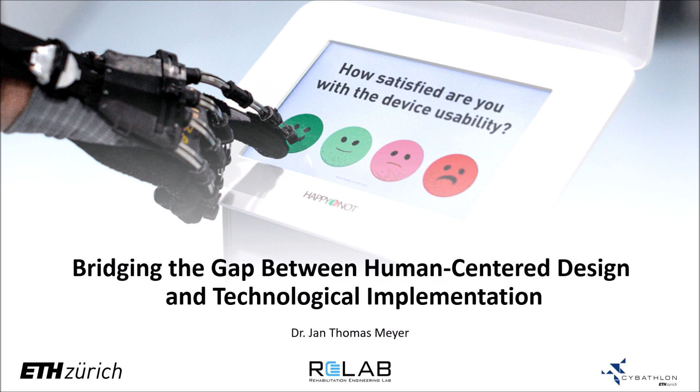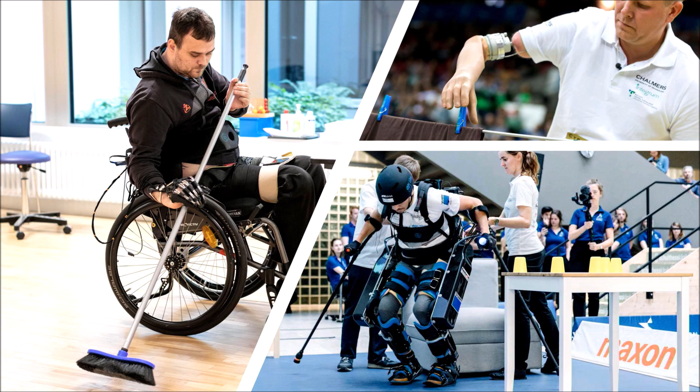Hello. Today we want to talk about how to bridge the gap between human-centered design and technological implementation. And for this, we of course first have to understand what human-centered design actually is. So, recapping a bit my personal situation, I have been very interested in advanced assistive technologies already in bachelor's and master's. And I've seen technologies all around the world, also, of course, at ETH, that look fantastic. You see people with disabilities getting a functional advantage out of them. And of course, at the CYBATHLON being showcased.

But looking a bit deeper into the topic, we realize that there is an extremely largely unfulfilled potential of advanced assistive technologies due to missing availability and accessibility. And that means that there are not enough devices on the market, simply said. Why is that? We believe that the main limiting factor of this missing availability and accessibility is actually the fact that the technology acceptance of these devices is still rather low. And also once they are deployed, there's a high chance of abandonment because the devices unfortunately have an inadequate daily life usability in a lot of cases. So this was something we had to look into.

And funny enough, this was actually exactly how I got into the topic of user-centered design, because the inadequate usability of a device that participated at CYBATHLON in 2016 is the reason why I stand here today. The VariLeg lower limb exoskeleton performed at the CYBATHLON 2016 with 2 pilots. And even though the performance was very good, the device ran smoothly, it was a beautiful experience for everyone, research wanted to continue on the device. And for this, we needed the pilots to come back into the lab and perform studies with us.

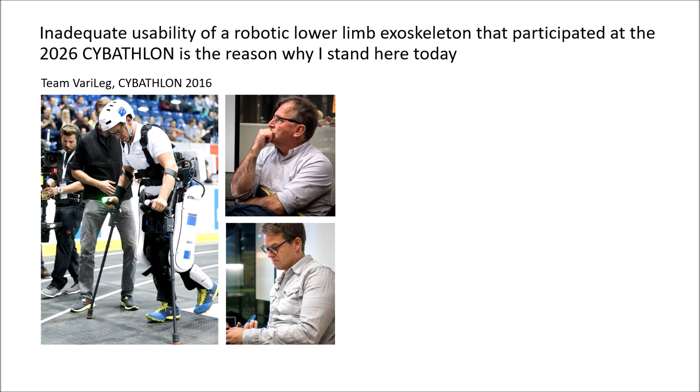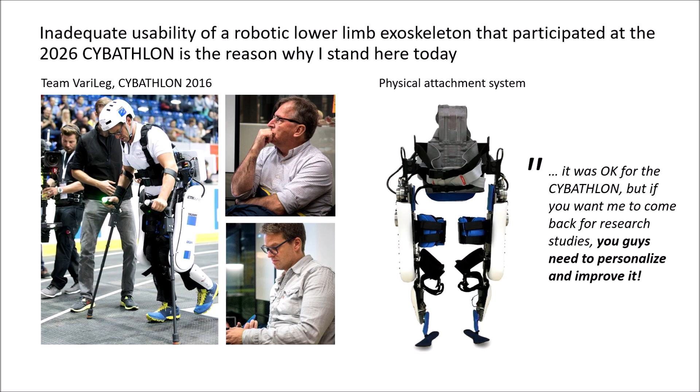Then they said, well, listen, the device was okay for the CYBATHLON. It was an amazing experience. But if you want me to come back and use this on a daily or weekly level, you really need to improve it, you need to personalize it, and it needs to be more comfortable for me personally. So you can see that using a device for a short matter of time, for a competition, is something else than using it over a long period of time.

And my challenge in that part, this was my master thesis actually, was to improve the physical attachment system. So how the pilot is attached to the device. And for this, I tried to follow a very simple mantra. Frank Chimero actually has a good quote on the fact that people simply ignore design that ignores people.

But what does that mean? It means that when you think about it logically, you can never develop a technology without the people that it is designed for. Right? And for me, it felt quite natural to try and develop a new physical attachment system together with the target users.

That meant, first of all, understanding what the problem really was, instead of already trying to go for a solution. So I really tried to understand what's the issue with the current solution. So we evaluated on a subjective level together with the target users, plus, of course, some people who can also tell a bit more about uncomfortable zones below, let's say, the injury level of spinal cord injuries.

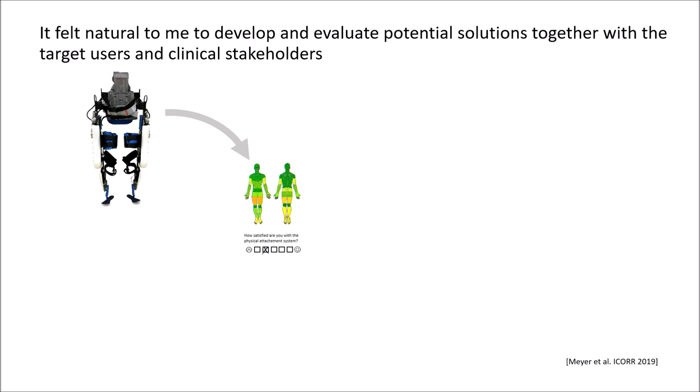We then had a lot of co-creative sessions together with those two users to understand how they would design it. They might not have the technical abilities at hand, but they surely have great ideas. And that's what we did. So together with the people with disabilities and together with the clinicians, we started ideating. Then we came up with a few concepts. Of course, nowadays you can do rapid prototyping with 3D printing.

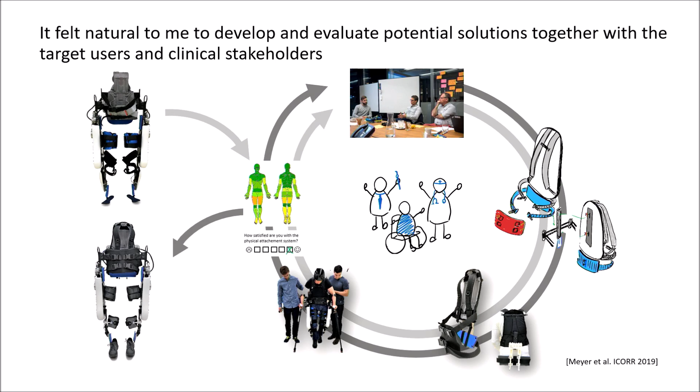And in all these steps, we always went back to the target users and to the stakeholders. And we asked them about their feedback, and we kept iterating. And we actually did this not only once, but several times, such that we eventually ended up with an improved physical attachment system. That was to the large satisfaction of those target users, because we were able to customize it, to listen to them, and to improve it.

Now, what we did there was actually the core of human-centered design. And if we look at human-centered design and simplify it a bit, it starts by empathizing with your target users. That means, again, before you go in and think about how to solve the problem, you first have to understand the problem. And who better knows the problem than your target users?

Once you have the wide problem space, you also need to define what areas of that problem space you want to address, because surely you cannot solve everything at once. So you have to go in and define your specific specs, your specific areas that you want to improve. And in terms of CYBATHLON, this, for example, means, do you want to be able to solve all the obstacles, or do you maybe want to be able to solve only a part of the obstacles, but on a very high quality? Right? That is a pure definition of your functionalities, and also depends, of course, on your target users.

You then go about and ideate, create concepts, you of course prototype them, and eventually you evaluate them, as you just saw on the example before. And the more you do this, the more you increase the technology maturity, and you actually have to give yourself enough time to perform these iterations. Because it is very unlikely that in the very first try, on your first iteration, you will be able to solve the problem fully. So very likely in the first evaluation phase, you will realize you have to go back and start. And this is actually a continuously iterative process.

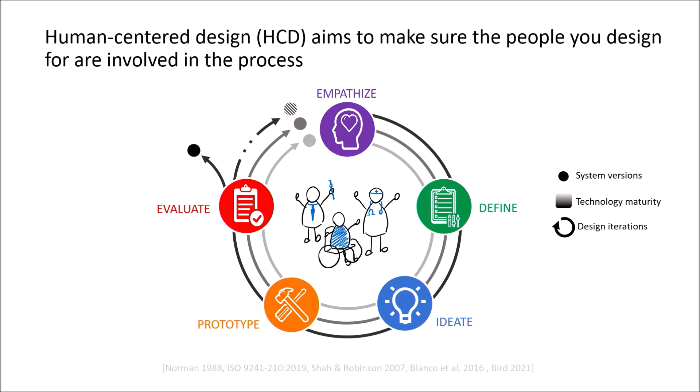Now, it seems quite simple, right? If I show you these phases, it all sounds very logical. But if user-centered design is that simple, how come then assistive technologies are often too complex and too complicated for daily life? Well, this question we wanted to specifically look at the CYBATHLON. Because the CYBATHLON offers the perfect platform to investigate the current development practices and also the success of advanced assistive technologies. If we look at it a bit objectively, what does the CYBATHLON offer in that terms?

We have target users who are essential to the teams. Without pilots, there will be no participation at the CYBATHLON. We have task-based races and disciplines that resemble activities of daily living. So we have daily life relevance. And of course, we have inclusion, diversity, and innovation as main drivers. And this per se gave us the perfect platform at the CYBATHLON 2020 to actually access those teams and to ask them how they develop technologies and how satisfied the pilots are about these technologies.

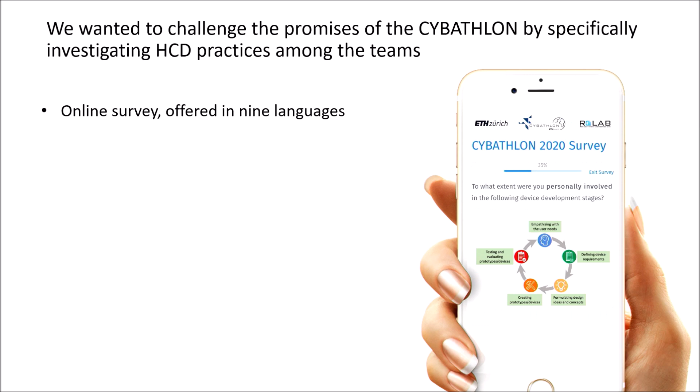So what we did is we launched an online survey in order to try and challenge the promises of CYBATHLON. We offered the survey in 9 different languages because CYBATHLON is a global competition. So therefore, we also had survey versions in Korean, Brazilian Portuguese, of course, French, Italian, and so on. What we wanted to understand is not only the pilot side, but also the technical lead side. And with technical lead, we included everyone that was involved in the technology. Some of them were more the project managers, but some of them were the lead engineers.

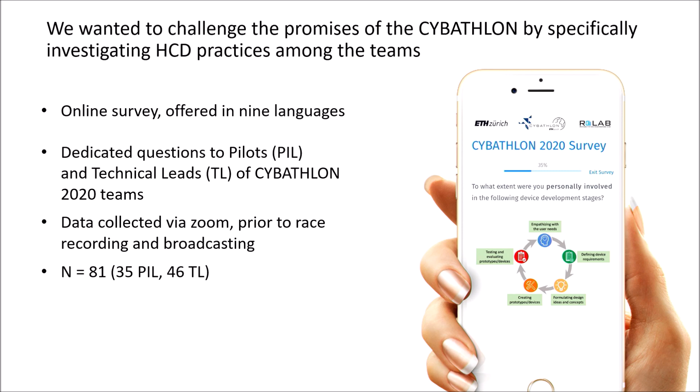We collected the data via Zoom prior to the races, so before any performance happened, right? They could not be yet disappointed or super happy about the performance. And eventually we were able to talk to 81 people. From that, 35 pilots and 46 technical leads. And now we can look into different interesting things.

First of all, I'm not sure if this is working, yes. We can see that from those 35 pilots, everyone except 5 were to some extent involved. That means 85% of the pilots that we surveyed are involved in their device development. That's a good number already.

And if you look into the reasons why some of the pilots were not involved, they were either using a commercial product, so there was not much more development happening, or they were not yet around at the time. That could also mean that there was another pilot in the same team that was around, and then they joined as a second pilot. And we had only one guy that said, well, I'm not a developer, I'm a pilot, so why should I be involved, right?

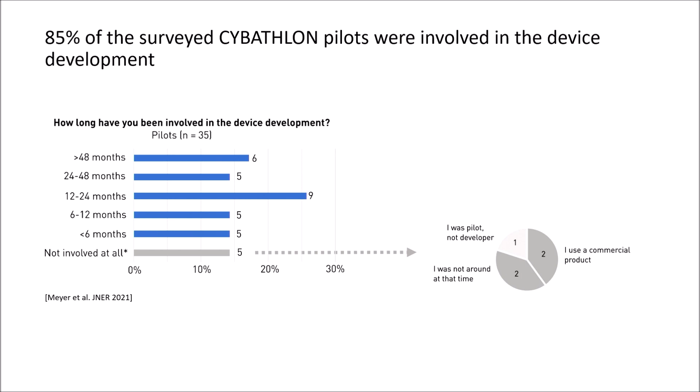But that number was interestingly low, so we can assume that most pilots are involved in the design, which means that user-centered design is happening to some extent or the other. But then we also wanted to look into those phases. So we have those 5 phases of human-centered design again here at the bottom, starting with empathize, and then going into evaluate.

And what we can see is in red, we have the technical leads. Their involvement is basically always leading. In dark blue, we have the pilots. And in light blue, we have the opinion of the technical leads about the pilot's involvement. And what you can see is that actually the pilot and the opinion of the technical lead about the pilot's involvement is very similar. So they are fully aware of what's happening.

And what we can see is that in the empathizing and in the testing phase, pilots are involved, so understanding the problem and then testing if you solved it, but not necessarily in those technical phases when we come into the solution space. That means we have to keep a human-centered focus in the technological implementation. And Max Erick is going to talk about that in the second part of this lecture in more depth.

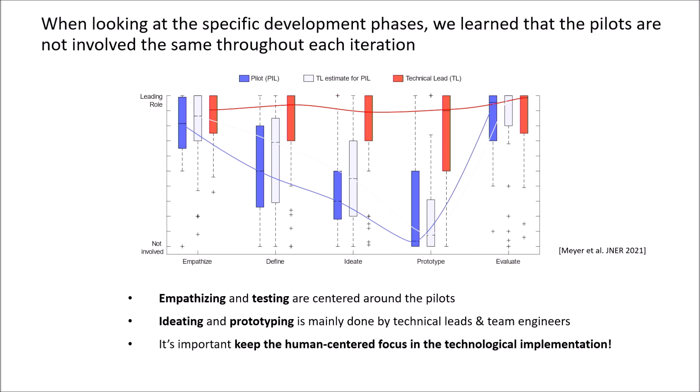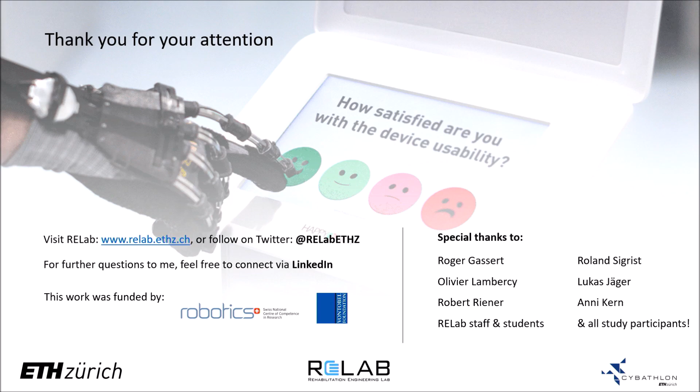And now moving to Max Erick, we have yet another question, which is how can we now keep the human-centered focus in the technological implementation? So Max Erick, you will give us some answers to that. Thank you very much, Jan. Thank you for this very nice segue also.

And yeah, I want to answer now to you, what are technologies and also what are methodologies that will facilitate user-centered design? And so the question is not only how do I get a technology portfolio, but how do I get there fast? Because we have seen we have the translation gap. And as a matter of fact, it is also due to probably underestimating the complexity of the problem, as has been said already by Jan.

About myself, the things you have not yet heard is that, yeah, I am an enthusiast of radio frequency, of optics, of mechatronics, of interdisciplinarity, especially also about medical technology. I myself come from a family which is populated with doctors. I'm one of the few renegades who is doing engineering. My job as a technology transfer manager is actually to connect people, to connect technologies to our company, to connect people of our company to our company, to help also support your teams. And by this also knowing what is lacking also in our company, how can we help you better with future products?

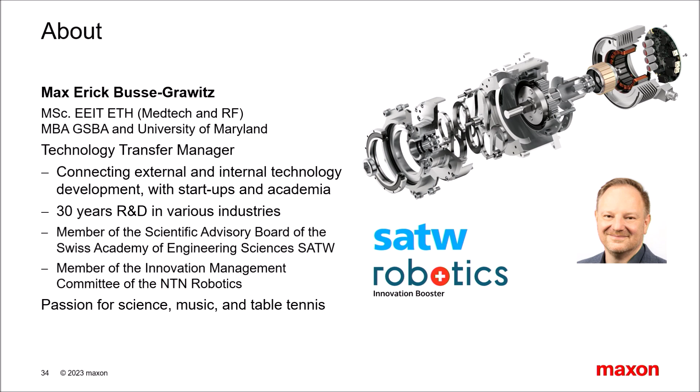One thing I'm also doing from time to time is I'm getting my fingers dirty. So for example, this project here was a collaboration with NTN Robotics, and I've learned a lot in this collaboration with NTN Robotics also. And we will be learning some of the lessons which I've learned also in that collaboration here.

In my spare time, I'm doing music, I'm doing photography, I'm doing table tennis. I have a passion for science, I have a passion for a lot of things, and well.

Now, without further ado, let's go for a simple thing. We have a lot of products, and the choice of the products may be overwhelming to you. Most people have already seen that slide. What perhaps many people are not aware of is that we have also acquired a company called Parvalux, and it's doing very heavy motors, which could be, for example, useful in wheelchairs or where weight does not play a role, but where price does play a role. So if you want to have a lot of power for not too many dollars, that may be a way to go also. And we're very happy that we can also have them in our portfolio since then.

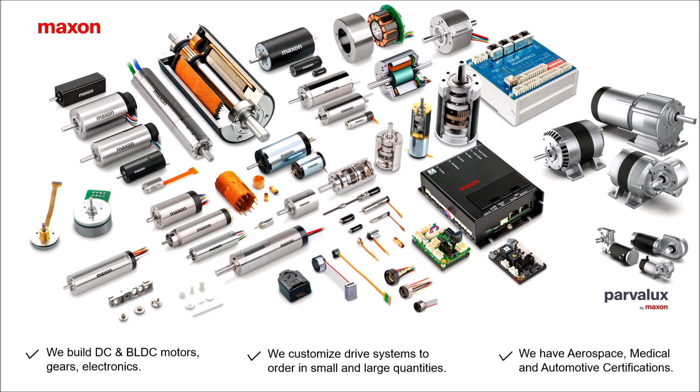Now, how can I save time in complex projects? Because you have seen there are a lot of motors, you have a lot of choices. How can I choose rightly? And the first thing is we have to be aware about the pilot tech gap, as we put it. And that's also something which I picked up from my colleague Jan.

And it's not only about the teams teaming up with the pilot. I think that's the easy part. The question is, we are sitting here and we are covered by layers of abstraction to the pilots. So it's very difficult for us as industrials to talk to the pilots directly. But when we do so, it's very enlightening. So why don't we talk too often to pilots?

What is happening here? First thing is the pilot has a user interface, if we want. Yeah, it could be a software user interface. So it's every gadget that he's using, everything, how it behaves, object recognition, intent detection, I don't know what. But then he has also a physical interface, which could be the adaptation mechanism. It could be the kinematics. It could be actors and sensors. And the actors are motors, gears, controllers, some other part also.

And oftentimes, people have the impression you can solve with software what the physics could solve. Yeah, and so the question is, what can we solve with software? What can we solve with physics? But also the same thing here, kinematics. Good kinematics are often a prerequisite to really getting use of the actor. So where you place the actors actually can be even more important than the choice of the actor itself.

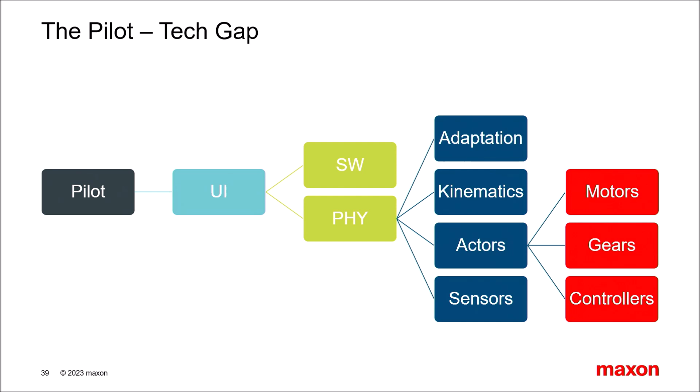And as we heard before, I think we are here in a country where we don't know what we're doing. We don't know what the customer is, so we don't know how a pilot is. We think we know what a disability is until, well, we find a pilot, or until somebody does an experiment, like, for example, injecting some liquid into your limbs, and then you don't feel anything anymore, and you're anesthetized, and then you find out how it is really to walk without, for example, feeling your ground reaction force.

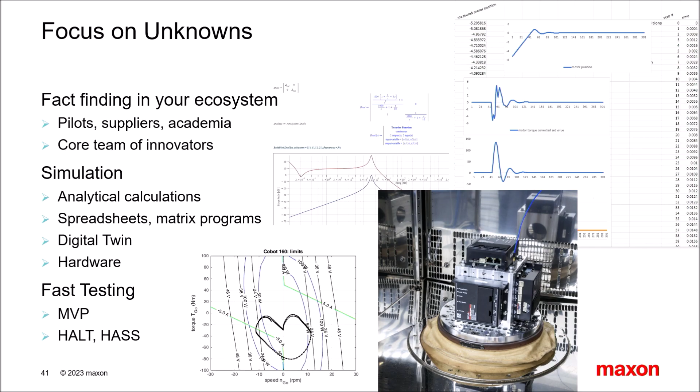And you may also want to talk to a core team of innovators. Not everybody is open to new experience. It's a character trait which is very difficult to change. And it's very frustrating if you have people in your team who are not open to new experience.

So you will have a core team where like-minded people will meet and who are completely open to be challenged and who don't take it personally and who are happy to be challenged and who are thrilled by complex environments and say, okay, I thrive on chaos and I like that.

Not everybody's business. Then what you want to do is you do simulation. And you do simulation already to eliminate errors. So to eliminate the obvious errors, you want to do analytical calculations, spreadsheets, matrix programs, digital twins, and you want to do hardware testing or part-time hardware testing.

And then, if you're going to hardware, the next thing is you want to do minimum viable products. So that means something everybody else is joking about. And that's always innovation. Innovation is you start out with something which is really ridiculous. And everybody else, your competitors will be saying, look at those guys.

Then the other thing you want to do is you want to destroy your product. So you do HALT and HASS. That means highly accelerated stress screening, where you find out where it could break, and then highly accelerated lifetime tests, where you shake your product and break it.

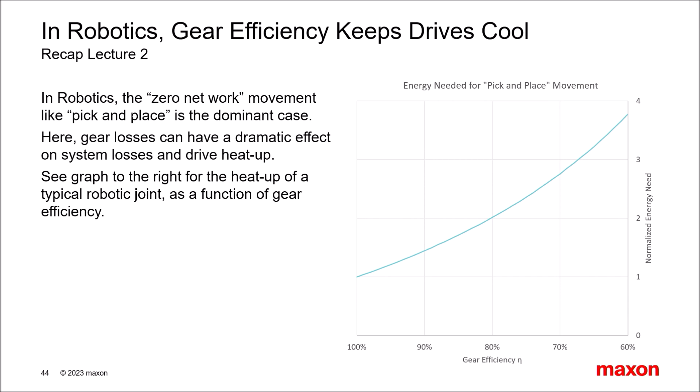So, let's say, recap from last lecture, efficiency is a key factor. Efficiency means that, in principle, you want to be in that region above 90%, probably 95% for your gears or for your ball screws. You don't want to be in these wave-generating gears here, you don't need those gears. And you see that there is a factor of 3 to 4 between good gears and bad gears for typical robotics energy consumption. It's not just some percent more. And for that reason, I think you should focus there. There's another motivation, and that's for the user experience.

Gear transparency starts really kicking in at 85%, and then things become really arbitrary because you put a certain current to your motor, and it could be something like this here, or it could be something like this here, and so you essentially don't know what you're doing. And that's a user experience where you say, yeah, it feels awkward, and it doesn't do what I want, and I don't get good feedback. It feels completely unhaptic, and I don't know what I'm doing here.

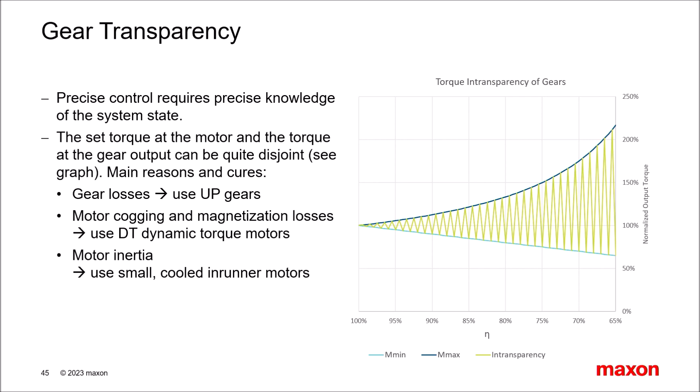For that reason, you could use needle-bearing gears, for example UP gears, ultra-precision gears. You could also use dynamic torque motors. Those are motors we especially designed for robotics, which are a good compromise between torque density and also very low friction and very low cogging. Because cogging also in a user experience is something really weird. Cogging would mean there's this kind of movement which really doesn't feel like good user experience.

Okay, and then motor inertia is something which software cannot deal with. For that reason, put motor inertia as much down as possible. It means low mechanical time constant.

Then also, some people say, yeah, but I need to use this inefficient gear because it offers me low backlash or zero backlash. The problem is that as soon as you're in a natural system, and a natural system consists of friction and elasticity, oftentimes you end up that the real elasticity, the real hysteresis you get, is dominated by friction times elasticity. So it's not at all clear that a so-called play-free gear really is play-free. In the real system, the friction uncertainty will generate a real-time hysteresis which can be in excess of a normal gear.

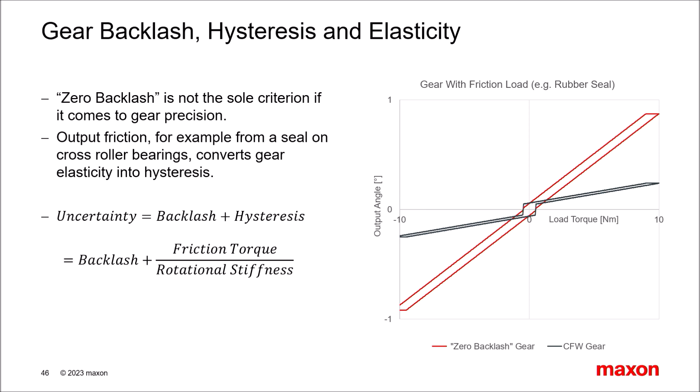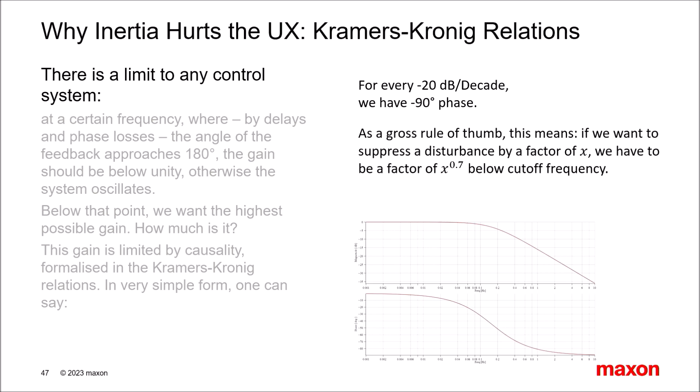And why inertia hurts, and why there's no software fix, is because of a very deep mathematical conspiracy called the Kramers-Kronig relations. As long as we're in causal systems, meaning a system which has a step response at t greater than 0, a system that doesn't know things in advance, then there are things about phases, there are things about amplitudes. Since a control system should have something like less than 180-degree phase, because otherwise you will have feedback and oscillate, in principle you are limited in your control frequencies, limited in the performance of your software.

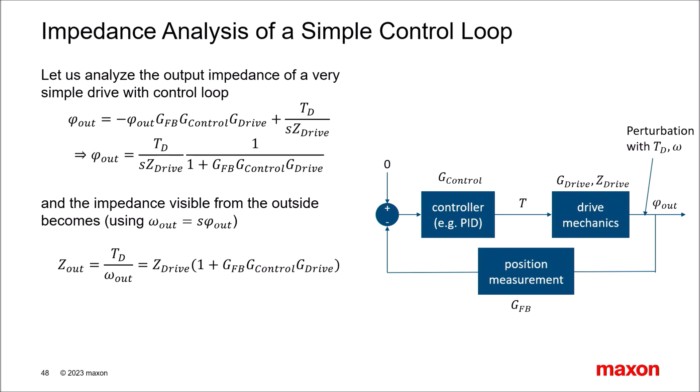Without going too much into details, because the mathematical theory is super difficult, let's analyze the impedance of a very simple control loop. Without going too much into detail, you find out after a little bit of gymnastics that you get this impedance out. Let's now decompose the impedance. S, by the way, means here the Laplace domain, so it means differentiation. And so 1 over S would be something else.

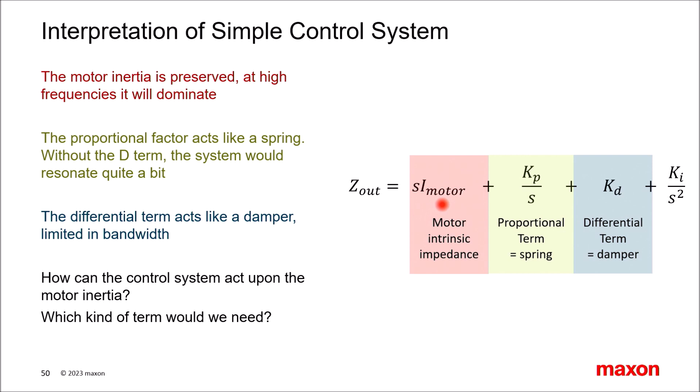But now the question is, how can I deal with this inertia? Because, as we see, the control system cannot change the inertia of the system. What do we do here?

So the first thing is, as we said, you get a motor with a very low mechanical time constant. But if you cannot do that, you could use, if you want, a negative D-squared term. And I would always say, don't try this at home. But if you want to try it out, it's really fun, do a negative D-squared controller. If you don't believe me, it's really fun, I've done that also. You have to do that once in your life.

The other thing is that you measure acceleration directly, and that would mean that you use gyros, or you use acceleration sensors, you use IMUs. That can help a little bit, but the problem is that those sensors also have delays. But that's a good approach, and with this, you can get rid of some of the inertia.

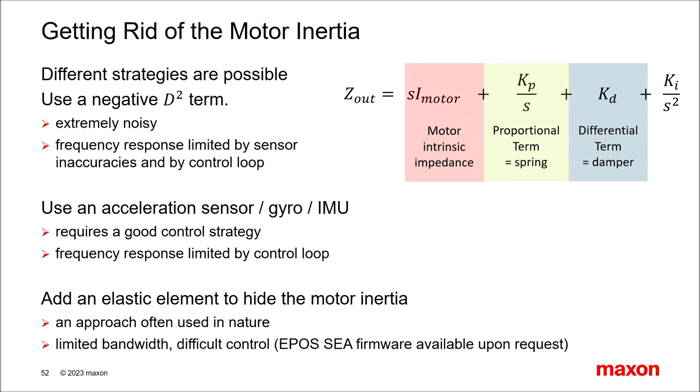Or the best thing is you add an elastic element. As every human is constructed, we have skin, we have muscles, we have everything else. We have interfaces to a physical environment so that we really don't hurt ourselves. Okay?

And also recap here is, you can solve the problems in kinematics. As we said before, we have this whole chain, and we can use springs for the known part of the problem. So if somebody's walking and here's its average weight, you add a spring to the whole system, and perhaps the spring takes care of stuff. And then the motors need to weigh less. And as we have heard, weight of the motor is a performance killer.

So do everything you can to do what you already know not with motors, but with springs. So use dumb elements for dumb tasks and only use smart elements for smart tasks.

You can use resonators, you can use lightweight designs, you can use tendons. That's very good in humans. You see everywhere that you have the tendons, you have the actuation always where the human is not. So you have here the muscles, and here you have the actuation, and most robots are constructed as if the muscles were directly at the hand, and then you ask yourself why they don't perform.

And as we said, motor with a low mechanical time constant and efficient gears. And also in the same vein, belt drives, ball screws, what you like. Everything which transmits torque very efficiently is okay.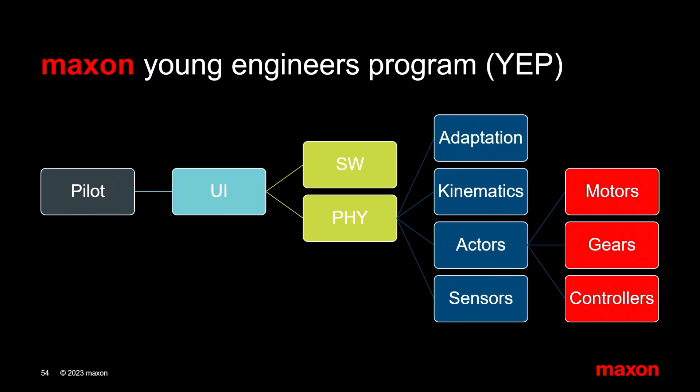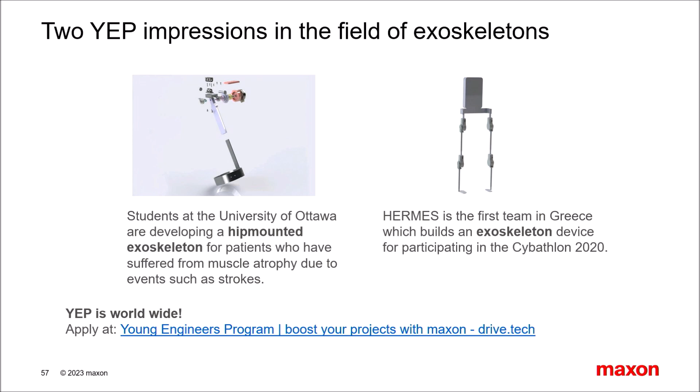And your take-home message is, methodology will save time if you manage your expectations, if you know which country you're in, if you know what you don't know. Then there are helpers for user experience. At least from a technological side, it's low friction, low inertia, and smart kinematics.

And please involve your value chain. And that means from customers to suppliers to everybody else. Put them into one boat, at least those who are willing, and then await better results than the last time, hopefully. And I wish you all the best for your competitions and CYBATHLON and to bridge the gap of usability.